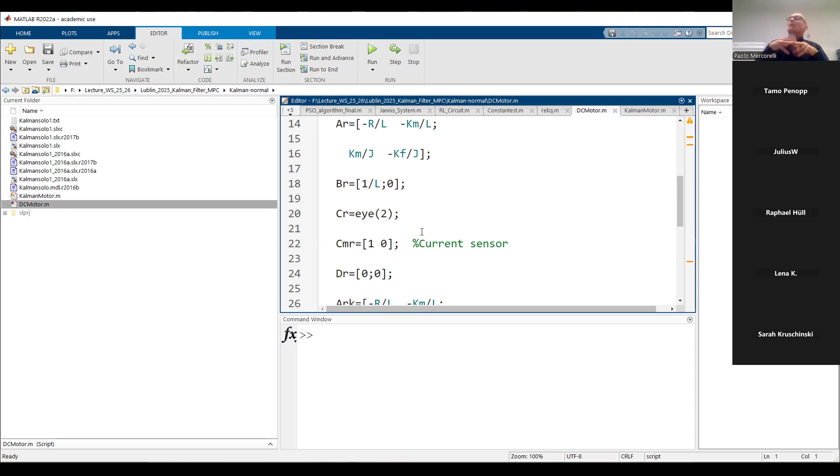We have here the values of the motor. We will see when I consider the model of the bank that it is not far away from this. The model of the bank is not far away because, at least in the model which I would like to present here, in the linear case, which will become a nonlinear case in terms of extension. We will see today what is the meaning of extension, which came from augmentation.

Look, here's the data with the matrices, with the discretization of the matrices, run. And then I will open now the Kalman motor, which is the M file connected with the Simulink file. Do you remember last time I told you here it was a very large value? And remember, I had some doubts why this large value. Probably at the end the student asked me to go more in depth about the meaning of this Q.

You remember, Q represents the uncertainties of the model. The name is model noise: what I don't know about the model. Of course, it's a quite abstract parameter. Roughly speaking, do you remember when we discussed the system with just one variable? This was a little bit easier because I told you if I know exactly that I am trying to estimate a constant,

the uncertainty of the model of the constant is just its discretization, because to discretize something is not exactly what I want to discretize. We have an error in the discretization. In this sense, the model is extremely easy. But you remember in this example I tried to estimate a sine function. The sine function is not constant. This means the model of my a priori knowledge is totally wrong. And you remember, I played with Q in order to estimate, nevertheless, the sine.

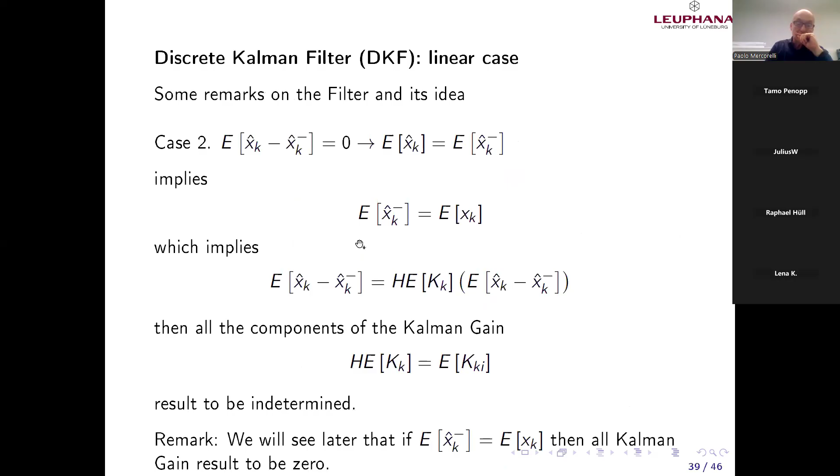This means for very large Q, we have to be careful because it could be that the Kalman filter does not react. This is the reason. This reflects nevertheless that the deterministic component, the component of the model, should not be so full of uncertainties. Better to say, the uncertainty of the deterministic part should not be so high. This is a possible interpretation of this sentence here. In order to work properly, and we will come back on this concept later, the deterministic part is extremely important in the Kalman filter.

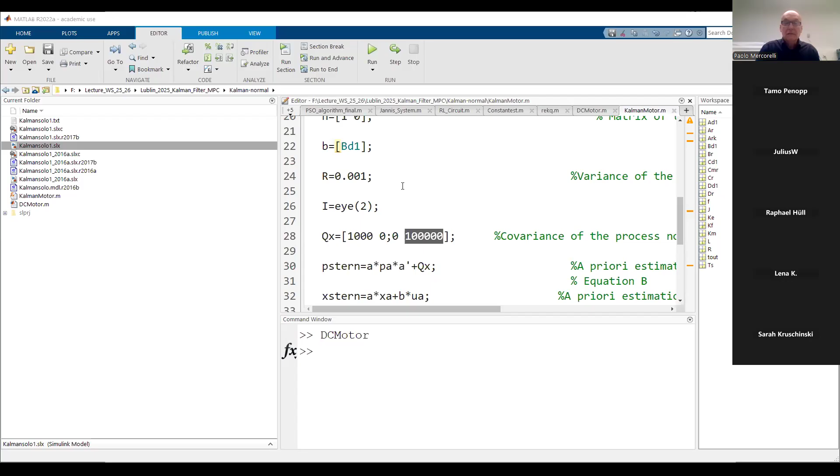Yeah, this means if I reduce this, for instance, I don't know now, also with respect to R, if it's more or less sensible, because R is also in the denominator; in this case it's not the denominator, but it is the component up to -1 of K. But of course, when this is very small, it could be that K is not so extremely sensible.

The reason we can see from here. If this part here, the variation of R with respect to, in this case, P, is very small, it is not sensible. Also in this sense, we can say that KK is not so sensible. We say that it is saturated also with respect to R. But let me show. It could be that it's not. And then we will try to discuss what happens. Let me run.

A little bit better? Yeah, it seems. Better or worse, I'm not sure. I didn't check. Let me show you, let me discuss. Keep in mind it would be nice if I put the measurements of the error. I can do that. But look at this, for instance. Just observe what we have. Let me say that we have a good approximation or estimation starting from 0.03, right? More or less 0.03.

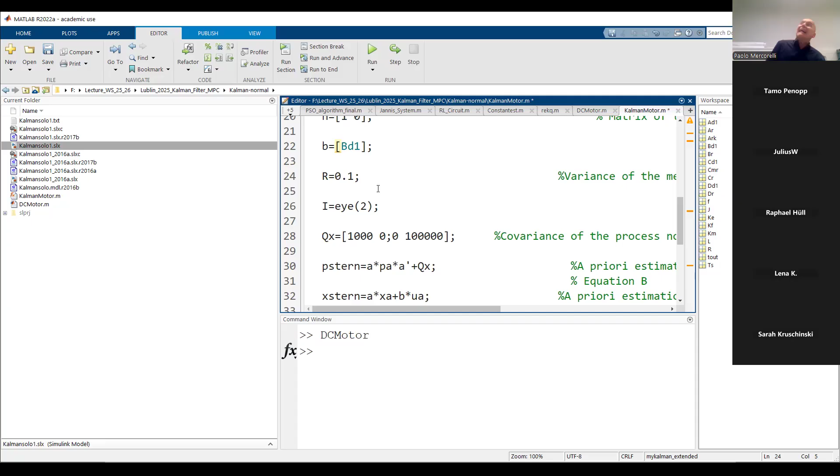This means I am trusting more the model, because I will import less measurement, or the measurements contribution. Let me show you what happens. Seems to be not very sensible, but let me show.

I cannot say much on this. Let me do another example. Let me reduce this, for instance. If I reduce this, it means I am trusting more the model of the velocity. This means, let me show you, trusting less the measurements.

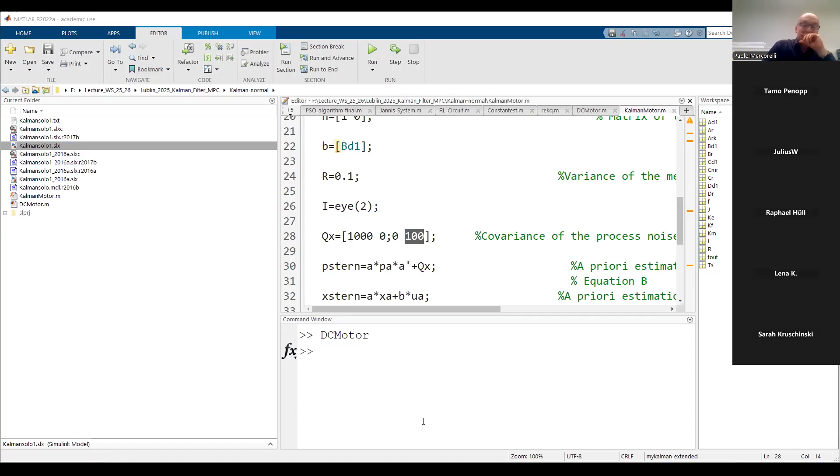Now we see the big differences; we will try to interpret it. Let me show you. The reason is, now it's clear what I intend. The reason is, it's clear that we are trusting more the model, particularly the variable omega, better to say the dynamics of the variable omega, the velocity. And of course, the correction part is less important. And we will see that we don't have strong corrections. And it could be that we remain with the bias, or the bias is corrected very slowly.

Let me simulate a little bit longer. Conclusion. Considering the parameters Q and R, and not only P0, I will repeat a little bit about P0, we can really change the performance of the Kalman filter. Nevertheless, we can see that the Kalman filter reacts very slowly, we can see now, slower than before, it seems, because before it was 0.03. Now we are definitively slow, but it gets the results nevertheless. But it needs time, because it needs time to understand that we gave not correct information.

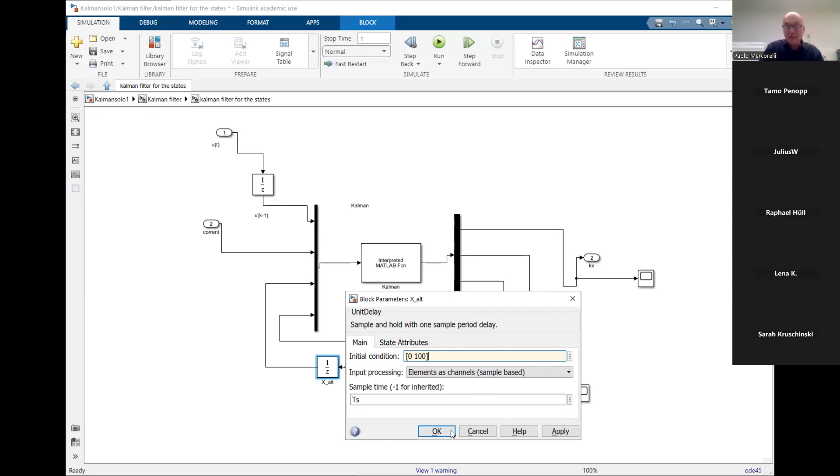Let me nevertheless change something before concluding. Let me reduce a little bit, and let me put this a little bit close to the goal. This means we simplify the life of the Kalman filter. I put here not 0, but something different from 0. Here, reduce a little bit, in order to give the Kalman filter the indication that omega is positive. Yeah. In fact, now we can see, I don't know if we improve, but in any case it seems to be correctly oriented.

The value is not increased, we can see, but at least it's correctly oriented. Let me increase now a little bit the value of the error. The reason why it's correctly oriented is because I put an initial value of omega positive. Before it was 0; putting it positive, the Kalman filter understands that the right direction is the positive direction at the beginning.

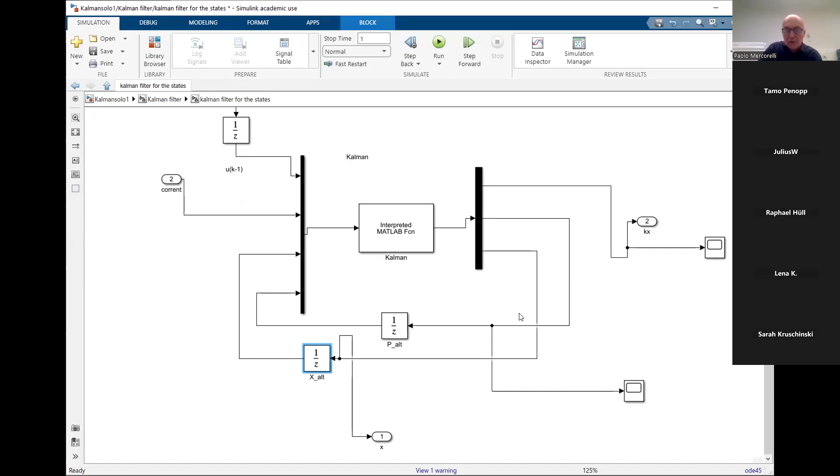Let me do two changes. I would like to put here... not this one. No, it's correct. This is correct. Excuse me. Let me increase here. I increase the error. This means I am saying to the Kalman filter, please pay attention that we are really far away from the goal.

Again, we have this peaking effect. This means increasing the error, it seems that I also need to increase the positiveness of the initial value of x. This could be some possible problem connected with the initial value of the error. But please pay attention. We are in some critical conditions, because if you look at the value, you have a value that numerically can also generate some problems.

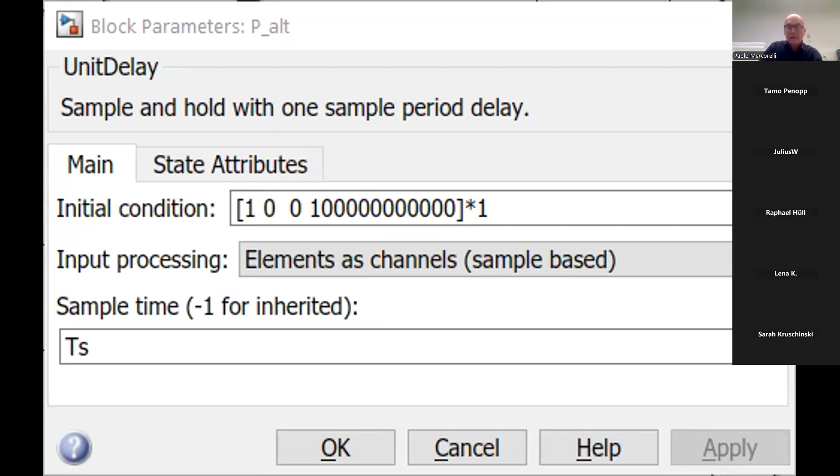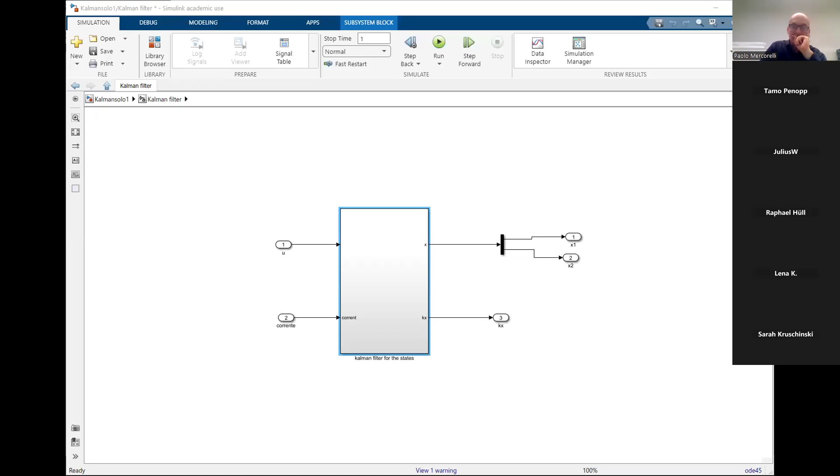Let me do another change in the value of variance of the... now I lost the orientation where I am, probably here. Yeah. Let me start with this. Again, we have a similar situation, which is the Kalman filter tends at the beginning to go in the wrong direction. But the problem is really, I think, that the value which I show you generates some numerical problems. Let me do the last attempt, introducing more reasonable values.

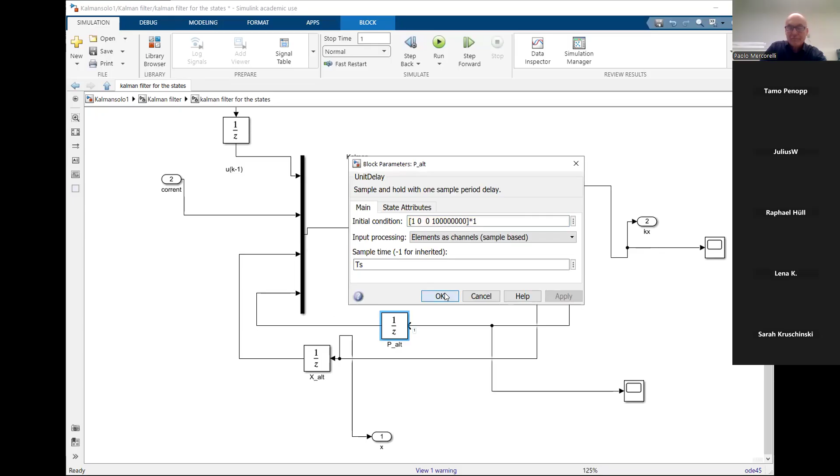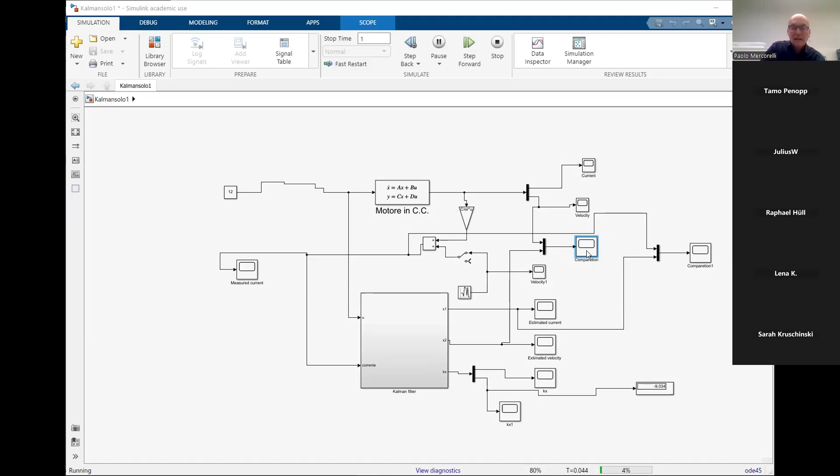See? Not yet. Probably I have to reduce a little bit. Let me see. Because also the numerical aspects, we will see a little bit later some issues in terms of numerical aspects. These numerical aspects are nevertheless important. This is the best result which I obtained with some more reasonable values.

Yeah, it seems that now the peak which we have here is the best which I obtained. And then the Kalman filter tries to estimate the real value. The real value is the yellow, which we want to obtain. Of course, if I start with some value close to the goal, it should be easy to get the result, in the sense I will obtain the result quickly.

At the end, the idea is that Q, R, and P0 should be considered as parameters to tune the Kalman filter, because it's not possible to know the value exactly a priori. The question which I received, to clarify again this scheme here, in which you remember I told you that P is exactly the a posteriori covariance matrix, or if you like, variance in the case of one variable.

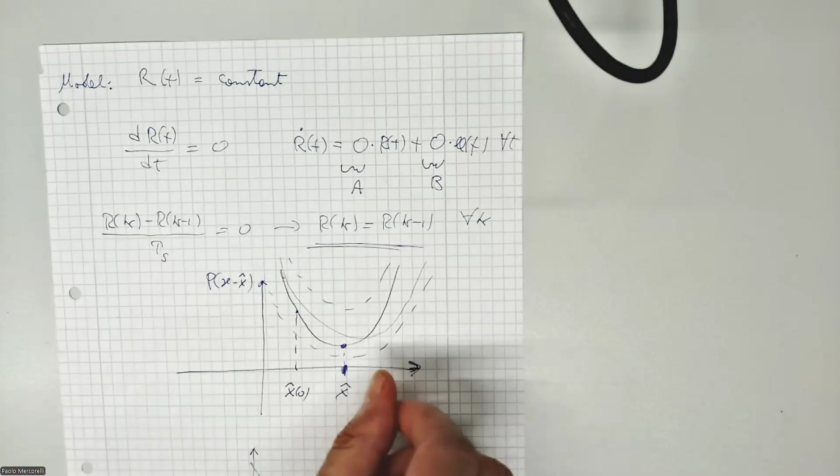And again, if the problem is convex, convex means a linear model, Gaussian noise independent, R and Q with mean value 0 and known covariance, white noise, we have the possibility to obtain the minimum, which could be the minimum in blue, or the minimum I indicated here in red. Between the two dashed lines we have the region with the possible convex P.

Of course, why do we have these uncertainties? Because X, the X of the Kalman filter, is defined as true inside some uncertainties, which depend on Q and R. And the initial value is exactly related to P0. This means everything depends on Q, R, the initial value of X hat, which, do you remember I told you, the orientation of the Kalman filter also depends on, and depends on P0.

The minimum, nevertheless, is the best estimation, but with respect to the Kalman approach. This means with respect to the Kalman hypotheses. Again, linear model, white Gaussian R and Q, independent, mean value 0, with known covariance or variance elements.

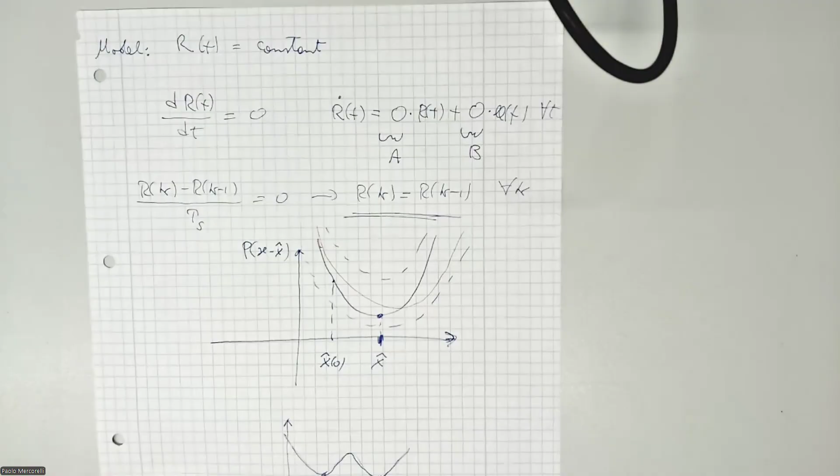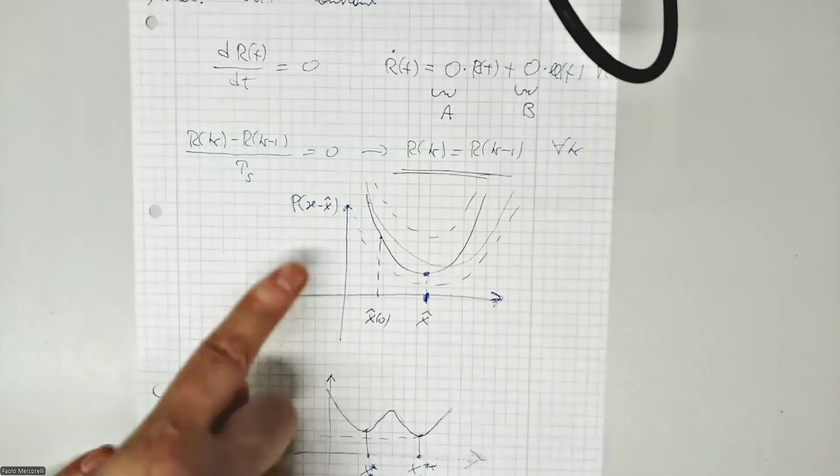This does not mean that we really estimate perfectly the reality, because the reality could not respect the hypothesis of Kalman, the hypothesis which I told you now. In particular, we will see today that the real case could also be not convex. The P of X minus X hat, in this case I would like to speak about X star, if you want, or X tilde, which is the real, could be also something like that, because the hypothesis of Kalman is nevertheless a hypothesis, an abstraction of the reality.

Of course, the closer the hypothesis is to the reality, the better and better we can estimate. What is the meaning of better and better? We can see here a little bit. We can see here that it could be that I will not get exactly the minimum. This means I will have a bias. I will have a larger, let me say, estimation. I mean, look here.

If this is the real situation, this is the best approximation. Assuming that I will get here, excuse me, I will get this value. If this is the real situation, this is the minimal variance. If I get this, for instance, with my algorithm, I will have a larger covariance and bias with respect to the real value. This could always happen because the reality is not necessarily Kalman reality.

We will see now what I intend when this model is not linear, when I have to describe the reality with a non-linear model. Now, I hope that I answered the question. The question was to go more in depth on this. Let me open the lecture of today in which I introduce the nonlinear cases, which is not exactly the hypothesis of Kalman. The first or basic concept of Kalman is the linearity of the model. Model means the representation of the system.

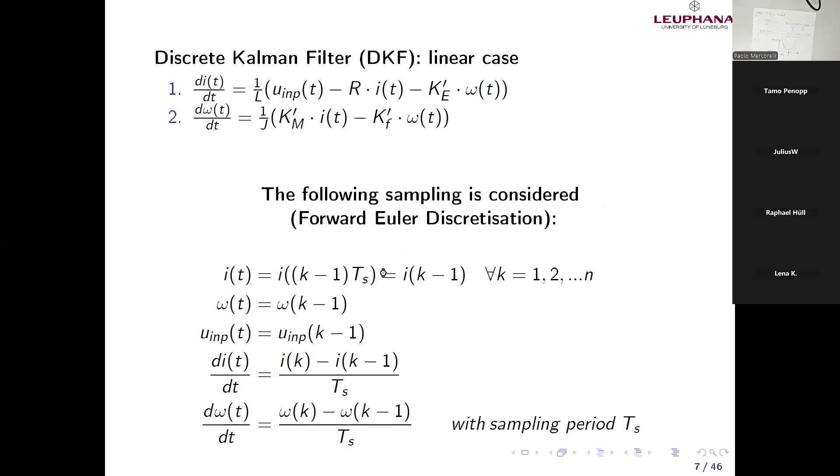Do you remember? I know it's not here. It's in the original, really in the first lecture. Let me come back. I think it's here. Now, you remember this slide?

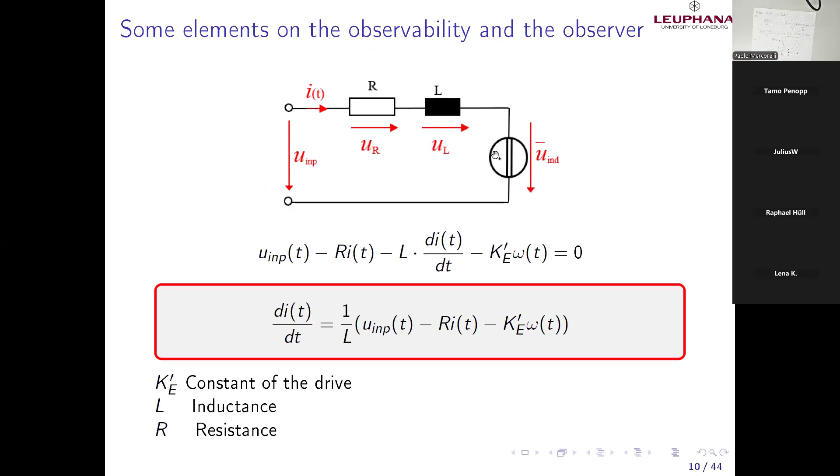Yeah, this here. When I introduced this slide, I tried to explain again the concept of linear and nonlinear. The linear case, I repeat it also today: the separation between input and state contribution, not only, the state contributions are linear. Do you remember A is a matrix? This means row multiply column, the X is a column. We have a linear combination. This means a constant multiplied by the current plus another constant multiplied by the velocity and so on.

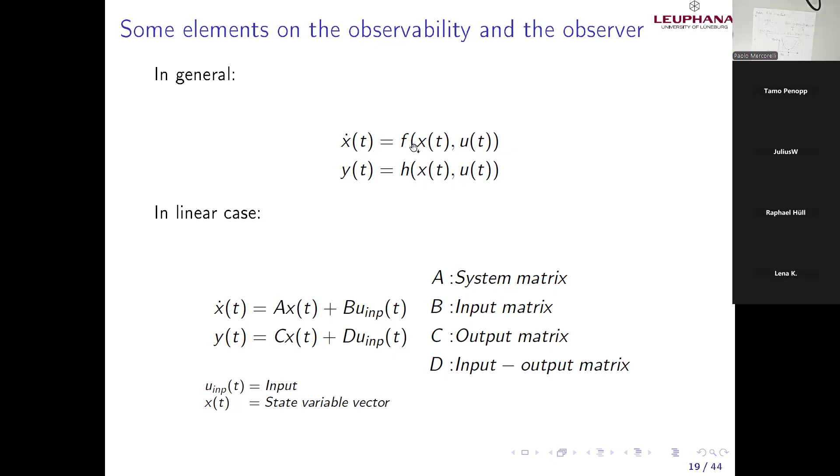Here, in the nonlinear case, we cannot have this kind of structure. This means we have an interaction between X and U, for instance multiplications, whatever you want. In general, a function between X and U, but also whatever kind of function of X, whatever kind of function of U. This means I cannot write it in this form. This F characterizes, now, the nonlinear case.

As I told you, the nonlinear Kalman filter, or better to say, the extended Kalman filter, which is just in a form of, now where is the lecture? I don't really understand Zoom. One second, I need time to understand. Oh, okay, now.

Please pay attention to what I say. In case we need a nonlinear model, we have many approaches with the Kalman filter. What I can do in this course is the extended Kalman filter, which is the most important, again with the classical approach with white, Gaussian noise, mean value, and so on. As I told you, we have two main approaches: the extended Kalman filter and the unscented Kalman filter. I have time just to tell you about the extended Kalman filter. The unscented is just an extension, a more detailed linearization, or linearization at more than one point. Let me go ahead with the extended version, which is the most important, the most applied.

We find in the literature that the extended Kalman filter is a linearized version of the Kalman filter, but it's not a linearization of the model, or better to say, not of the prediction, but a linearization using the Jacobian in equation B. Not only, but let me explain this case at the beginning.

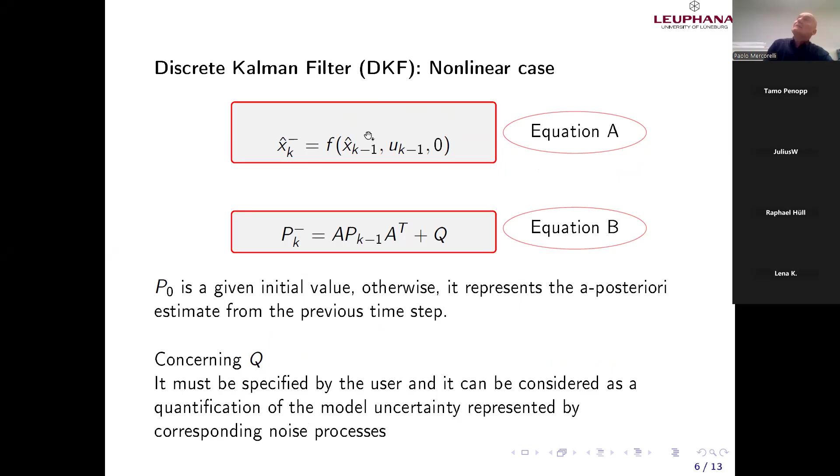Here it's a little bit an extension of Taylor because we have a field. Field means an F which depends not only on one variable but on two variables. This means in this case we have to consider not only the unique derivative, we have to consider all possible combinations of all derivatives. We will see an example also today in which we have a 3 times 3 matrix to be analyzed. The rest of the equation is quite similar.

I mean, today we will not analyze the nonlinearity in H. This means H is exactly as in the linear case. But if H has some nonlinearity, of course, this H capitalized is the Jacobian matrix. It's easier to do some exercise instead of clarifying with words. Nevertheless, let me show you, to understand a little bit better this slide here.

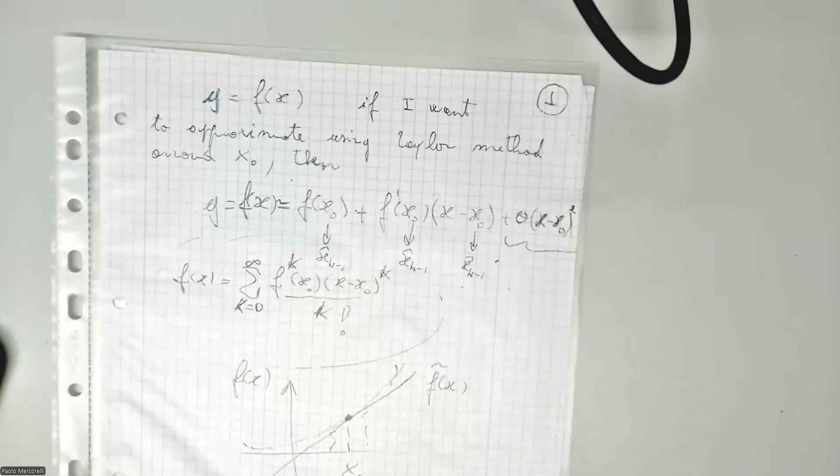Now, our point x0, we can see here, is exactly our x hat k minus 1, in accordance with the definition which I told you. Why that? Because this here was, or is, this point here.

This is the calculation of my system at x hat k minus 1, of course, and u k minus 1. Look, it's exactly what I told you. It is the function f of x0. In high school, you can consider this expression here complex, of course, f of x0, or let me say reflects f of x0. Basically, the function calculated at x0.

What is x0 in our case? Again, I would like to calculate my field, my complex function, which depends on current, velocity, and u at x at the approximation at the step before. And of course, u calculated at the step before. This is, let me say, our goal: to approximate the function f at point x0, and I try to clarify what x0 is.

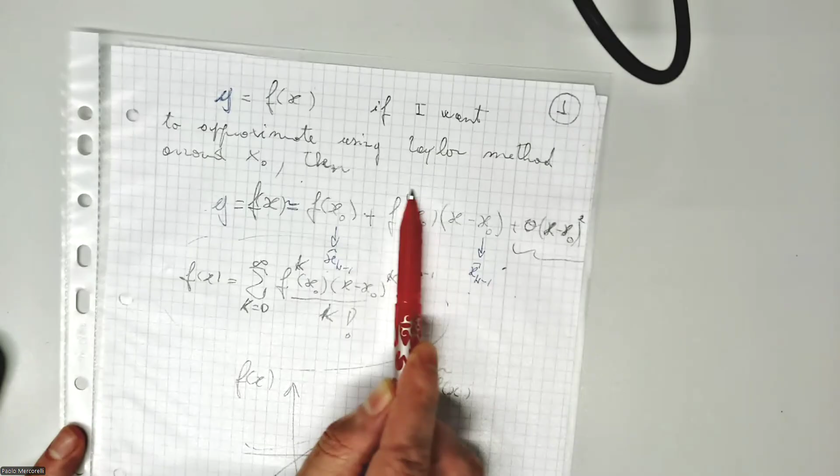Now, the rest, excluding this, is the derivative at point x0, which in our case becomes the Jacobian. Because as I told you, the Jacobian is an extension of the derivative when we have more than one variable. If you have more than one variable, of course, I have to consider the matrix and not a scalar. Calculated again at our point x0, which in our case is complicated because it's x hat k minus 1. And to be precise, I have to also consider u k minus 1 if this depends on u k minus 1. X minus x0 is exactly what we have here.

X, in accordance with what Kalman is, minus x0, what we want to approximate. Then we have the noise, everything which I can consider as noise because these variables are stochastic variables. I do basically the same, as we can see here, in terms of the output. Here is exactly h calculated at x0. I don't know if you remember. It's probably also here. Yeah. This z k hat minus, exactly this here. Yeah. In terms of output.

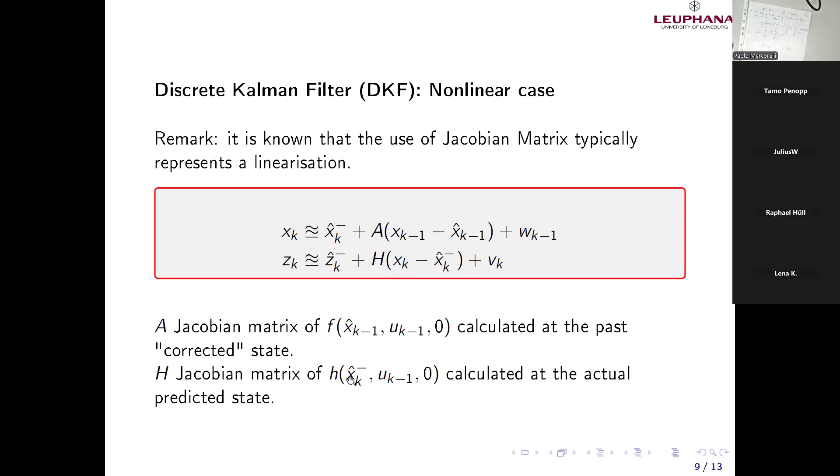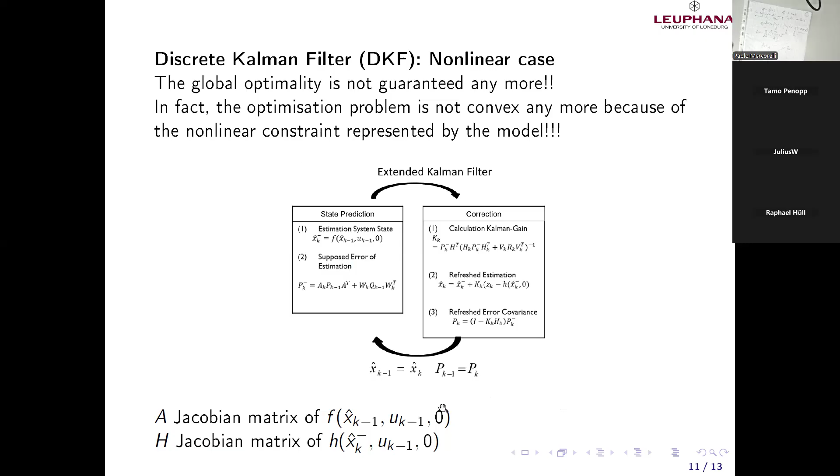Considering the tuning, of course, the concept remains the same, but I would like to summarize everything saying that the convergence is not guaranteed anymore. And also the optimality. Why that? Because now, in this case, the problem is not convex anymore. This means I could have more than one minimum. No one guarantees that I will really get the minimum. I have to start close to the minimum to have the probability that I'm going here, but it's not guaranteed.

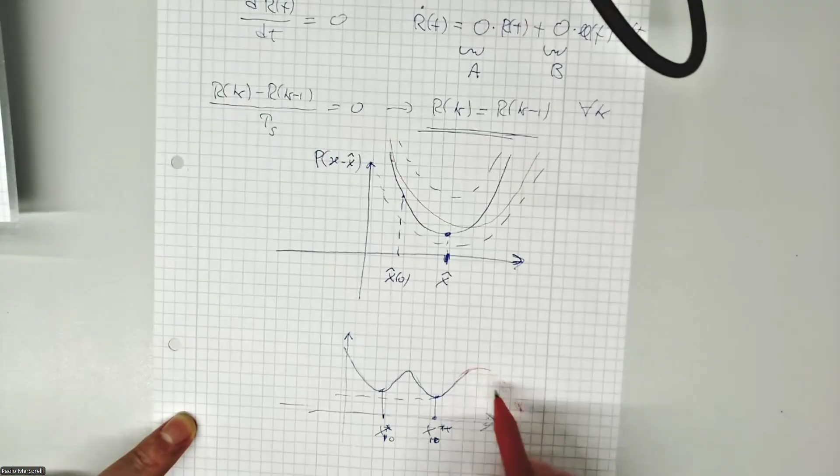And now you can consider that it could also happen that we have no convergence. This means instability, because the function to be optimized, the P to be optimized, the a posteriori error covariance, is not necessarily convex. This means it could happen, let me say roughly, that the Kalman filter doesn't work at all. But of course, if you are close to the global minimum, the probability that I will remain here and converge here is high.

In particular, if P0, as we have seen, is not so large, we pay this price with a slow convergence, but we remain here. Of course, if P is large, the Kalman filter can react very strongly, and then it could happen, since this is not the linear case, that we have instability. Of course, starting from this region here, I will obtain a suboptimal solution. This means larger covariance, but the problem is we have a small bias because the estimated value is here. Or assuming that the value is here, we obtain this.

This means, of course, it's not bad, but if this is the true value, with the minimal variance, we have a difference between what we obtain and what we really have.